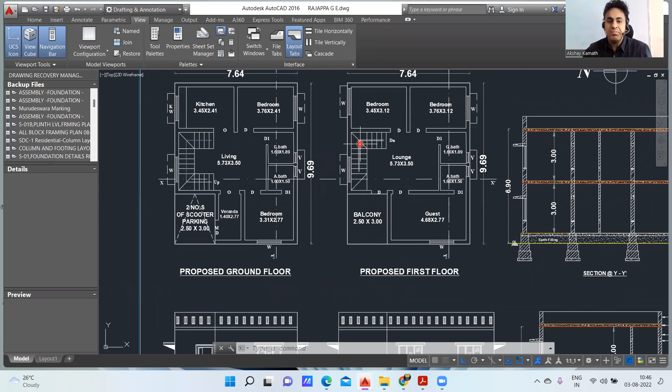So here they've given a kind of lounge so you can sit and relax, with sofa sets here. And whatever kitchen you had in the ground floor, they converted that kitchen into a bedroom.

So again you can see a bedroom here, which is 3.45 by 3.12 meters. Then you have a door here and another bedroom - whatever bedroom you had in the ground floor has been converted into another bedroom in the first floor.

Now the bathroom - always remember the bathroom we never change. Whatever is there in the ground floor, we usually try to take it to the first floor only. So you had a general bathroom and an attached bathroom in the ground floor, and the same thing you can see here - general bathroom and attached bathroom.

And then this entire area, like you had a scooter parking here, right? There was nothing there. In the first floor we utilized that area and converted it into a balcony. Like you come from here, this lounge area - they've put a door here and you can come to the balcony. So this portion, whatever was being utilized for parking, has been converted into a balcony in the first floor.

And then this veranda and bedroom portion has been converted into a guest room. So it's a very big room for the guest. It's very good planning what they have done.

If there are two or three different families staying, this is a good plan. You have enough bedrooms in the ground floor - one and two bedroom, and on top you have another two bedrooms, which is four bedrooms total, plus a big bedroom for a guest.

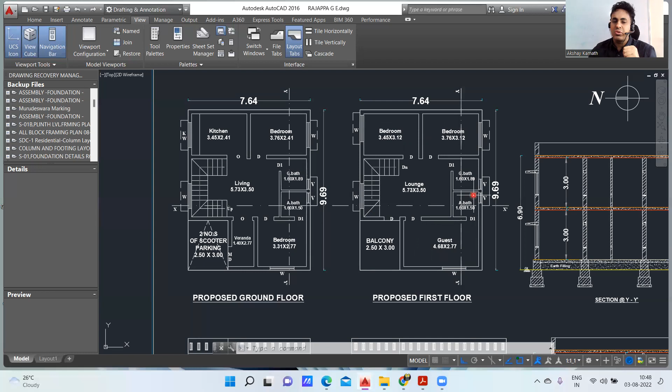So it's very good planning, and you have a good number of toilets also. One general toilet where this bedroom and this bedroom people can utilize, and then there's one more bathroom which is attached. Very good planning they have done.

Now we'll come to the elevation part - how your building is going to look from the front side, right side and all. So this is the front elevation: this is your ground floor, this is your first floor, and this is your parapet wall.

Parapet means whenever you do construction on the top floor, you don't leave it open - you put a small wall of about 1 meter so it acts like a barrier, so no one gets down from there or falls down. So this is the parapet wall, and this cantilever is called a chajja.

Okay, this is your window here, you have another window here, and this is your balcony portion. Now in the front elevation, if you observe the balcony, whatever you see from the front looks like this - you have a door here.

This is that door, D - can you see the D here? This is the balcony portion, and this is your window here, which corresponds to this particular window, because it's the guest bedroom. This is your front elevation - this window is this window, and this particular portion is this particular portion.

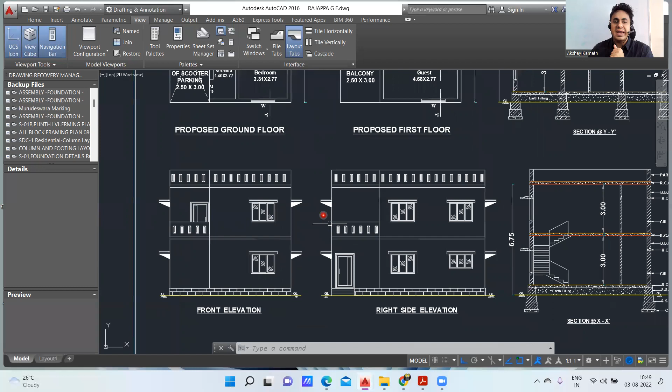Now we'll see the right side elevation. So how will my right side elevation look? If this is my right side, agree with me? So in this way your right side elevation will look.

So again, this is how your right side elevation looks - again it's the parapet wall here, this is your first floor, this is your ground floor. Again you have one, two, three, four windows here, and you have a door from here - it's the main door.

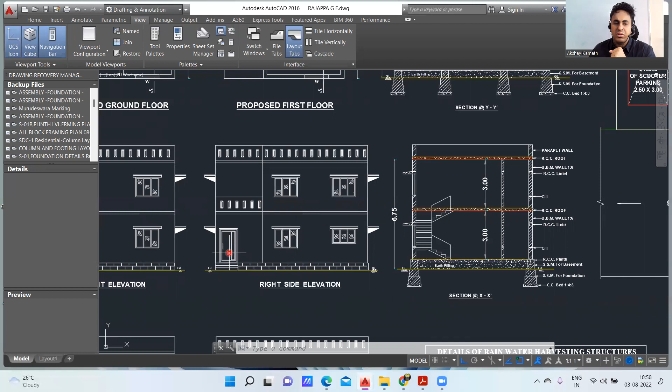Next, coming to the section part - again we have the rear side elevation from the back, showing how your building is going to look, and this is your left side elevation. So in this way you are supposed to do the elevations also, so the client gets an idea how his building is going to look.

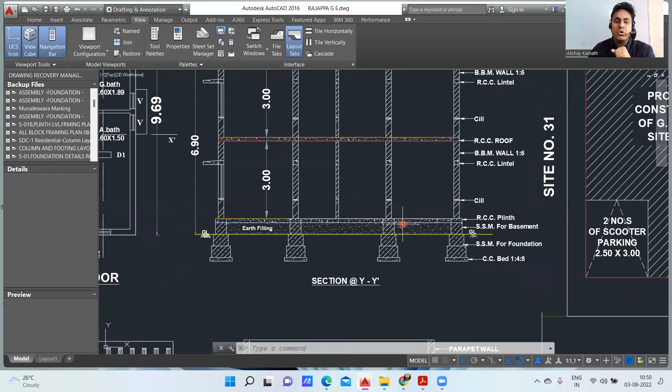Now coming to the section part - here you're going to get the depth of excavation you're supposed to do, what is your floor to floor height, and all. So we'll start with this now.

So this is a CC bed - CC stands for cement concrete bed, I'll repeat, CC stands for cement concrete bed, usually called PCC, which is plain cement concrete. After that we are going to do the masonry work - stone masonry work. Soon after that, we construct with the help of laterite stone in local construction.

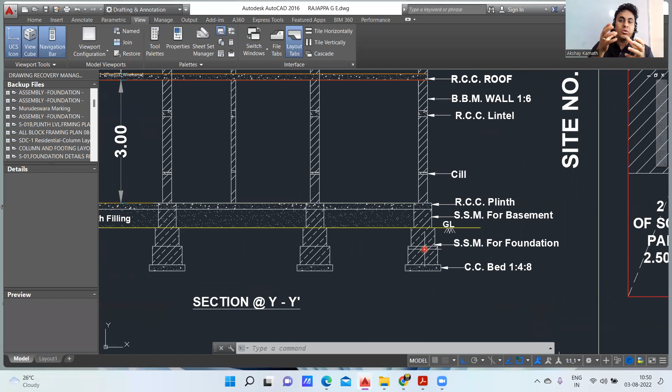We make use of stones and construct up to ground level. Then we put the plinth beam, which is RCC for the plinth. You put the RCC for the plinth beam, and then we come to the ground floor.

This is my ground floor. What is my floor to floor height? What is the distance between my ground floor and the roof of my ground floor? It will usually be 3 meters, as shown here, from here to here. This will be your slab thickness. This is your first floor slab, usually 150 mm, or 6 inches.

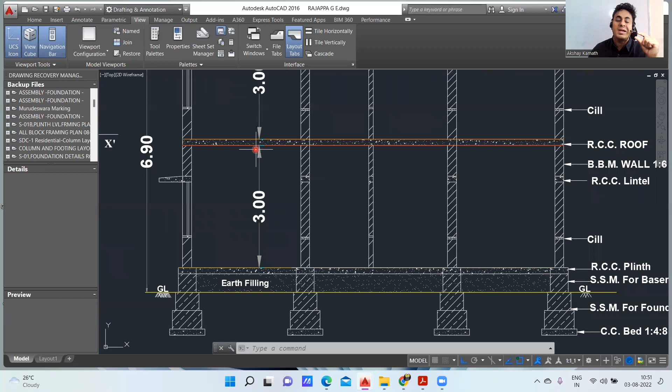So now floor to floor height is 3 meters. You have a RCC lintel here, and then you get a RCC roof here. Then again, this is my first floor, and again the floor to floor height is 3 meters. Again, this is the RCC roof.

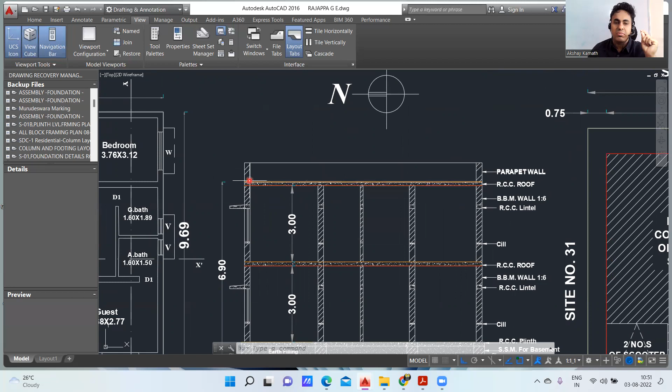Over that, the parapet wall is going to come. This is my parapet wall, which they have mentioned here. So the total height of your building from ground level to the top of your roof is 6.90 meters, that is 3 meters plus 3 meters, plus this additional height you need to add, which comes out to around 0.9 meter, or 900 mm, which they have added here.

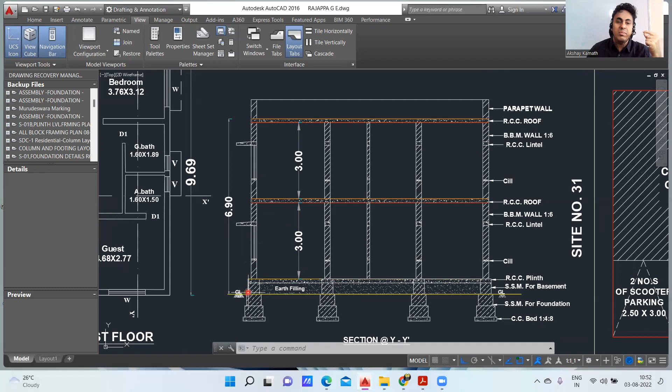So you got an idea how your entire structure is going to look. This is a section, and this is another section they have cut, showing the staircase part.

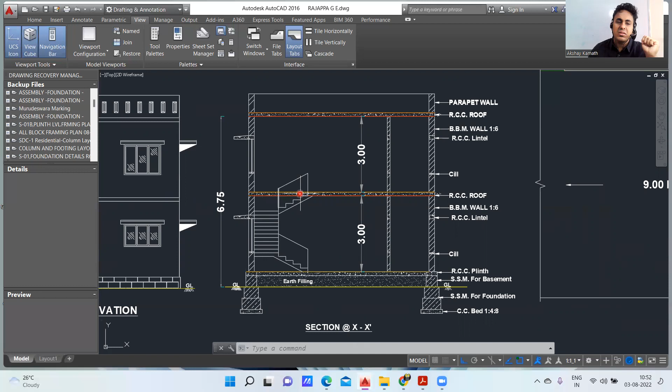Your staircase will start from here. This is your landing area, these are your steps, and this is your flight. This is flight number 1, and here you take flight number 2. This is a landing area, and this is flight number 3, because your staircase is in this shape. You come here, this is a landing area, then again you go to the top, this is landing area, and then you reach the first floor.

So I think most of the things I've covered here. This is the details of the rainwater harvesting structures. This is typical of what people try to do, because now government is making it more mandatory to conserve water. We don't want the rainwater to just flow away.

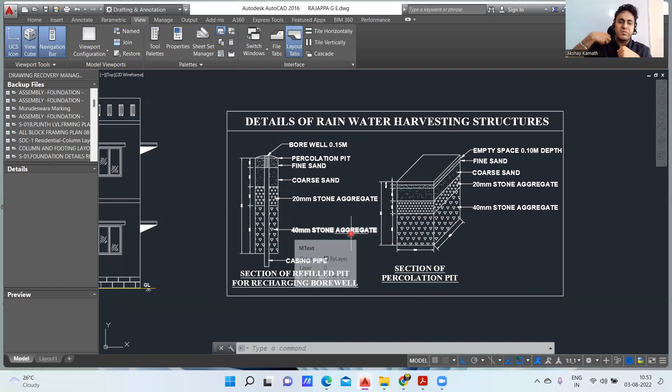So what we do is try to make a rainwater harvesting pit, so that the water gets collected and the groundwater increases, the water table increases, so that we don't have a scarcity of water. This is a typical section of a percolation pit. You just have to do the excavation. The total excavation depth will be given here, roughly 3.83, about 10 feet, is what you are supposed to excavate.

Then this is a borewell which we are going to dig here. Then all these things are 40 stone aggregate you are going to put, then 20 stone aggregate, then you put coarse sand, then fine sand.

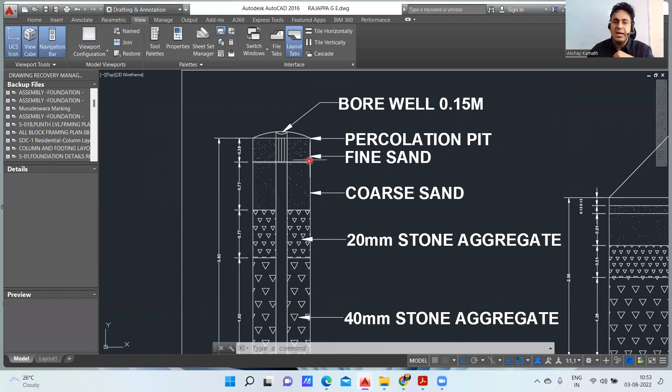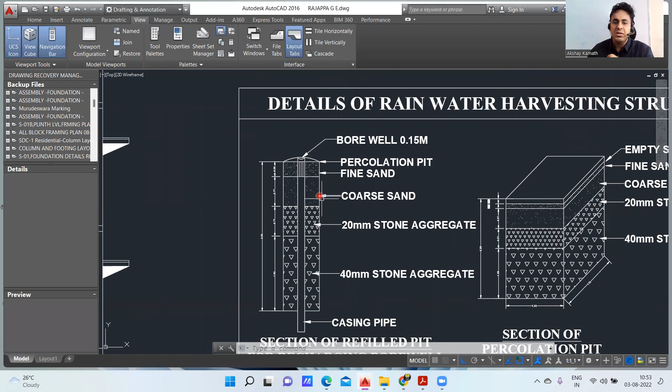Why is it arranged in this way? Because the water has to percolate through it in this order. That is why we put fine sand, then coarser sand, then 20 stone aggregate, then 40 stone aggregate, so that if any dust is there, it remains here and does not go to the bottom.

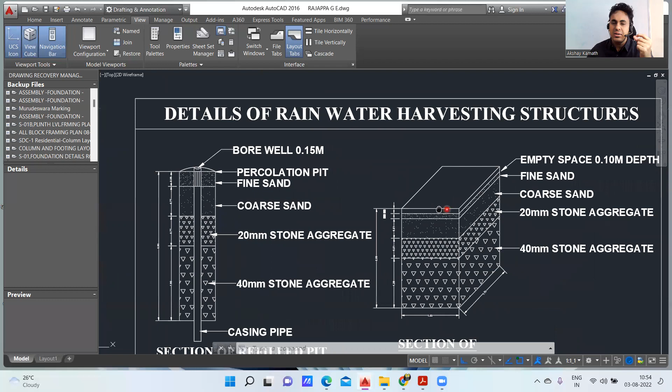So this is how a typical rainwater harvesting structure looks. You have 40 aggregate here, 20 here, coarse sand, fine sand, and an empty space of around 0.10 meter depth.

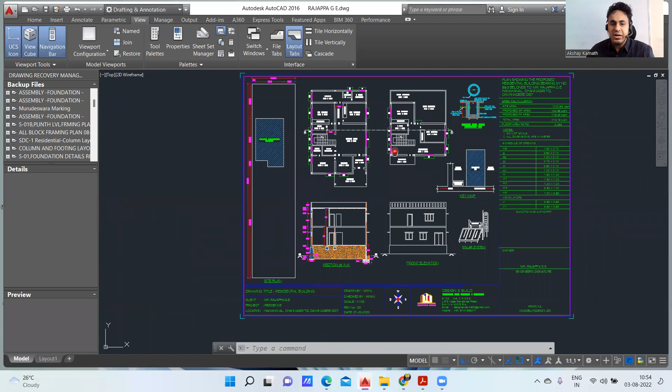So this was all about the plan we had taken for this building. Similarly, I'll be showing you this in the color one.

So this is a different building what we have, and here the plan is again different. No issues, we'll take this up in the next lecture.

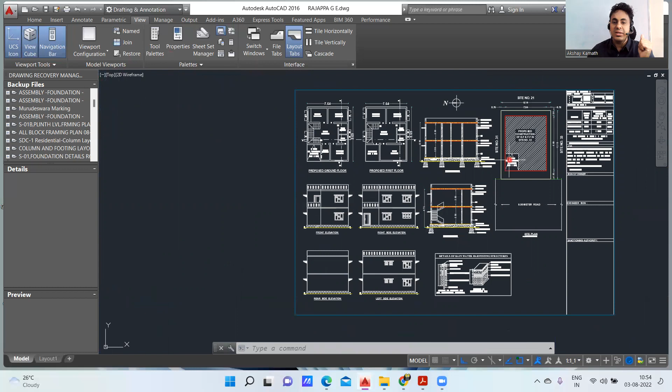So we are done with this particular building, and I hope you have understood how the plan has to be understood, what the section is, what the elevations are, and how the front elevation and side elevation look. In the next lecture, I'll either take up this particular drawing so we get an idea how this works out, or we'll take up another 2, 3 drawings so we get an idea.